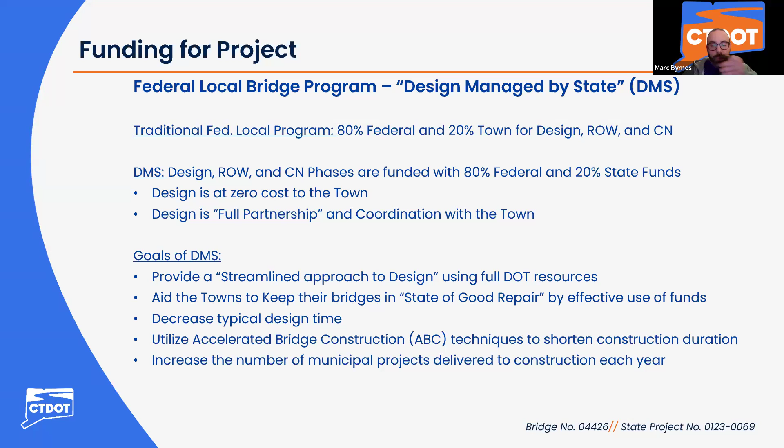Supporting the superstructure are the abutments, or the substructure. Wing walls will also be present on abutments to act as earth retention. And depending on the span of the bridge, you might see one or more piers.

Bridges are given a condition rating on a scale of 1 to 9, with 9 being in excellent condition and 1 being imminent failure. Bridges are inspected on a biennial basis by the department. If there was any issue, they would alert the town immediately to make corrective repairs.

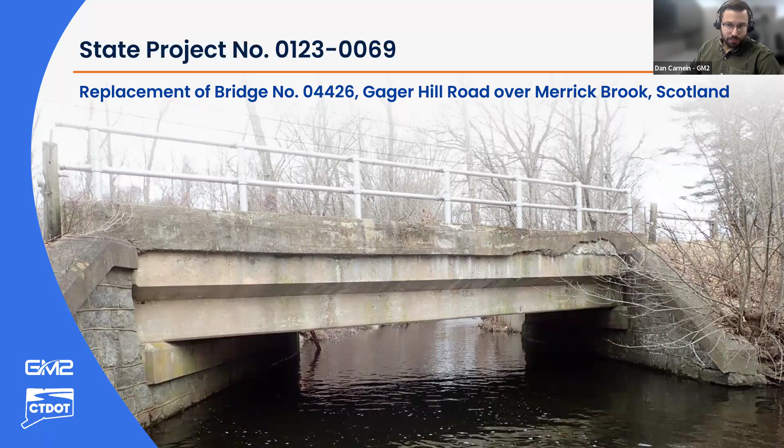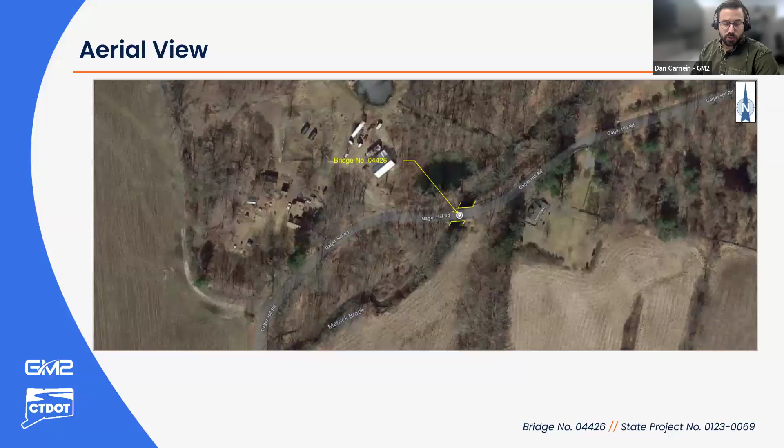That superstructure is supported by stone masonry abutments with reinforced concrete caps and wing walls. The existing span length is 33 feet and the total length is 35 feet. Based on those measurements, the bridge is undersized for the channel, which was measured at 40 feet. The existing bridge is hydraulically inadequate and does experience flooding during storm events.

The bridge provides 2 lanes of traffic with a 25-foot 9-inch curb to curb width. We also want to note that there are overhead utilities located upstream from the bridge. The existing roadway is classified as a rural local road with an average daily traffic of 357 vehicles per day. It has a 30-mile-per-hour speed limit, and there are no existing sidewalks at the site.

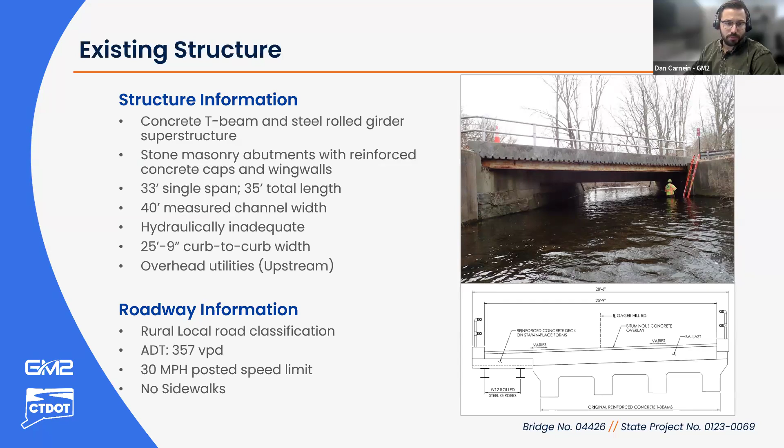Looking at some of the existing conditions, this is the approach, overall in good condition with an overall rating of 6. We want to point out that there is metal guide rail along the north side of the road, and on the south side we only have wooden posts along the edge of the road.

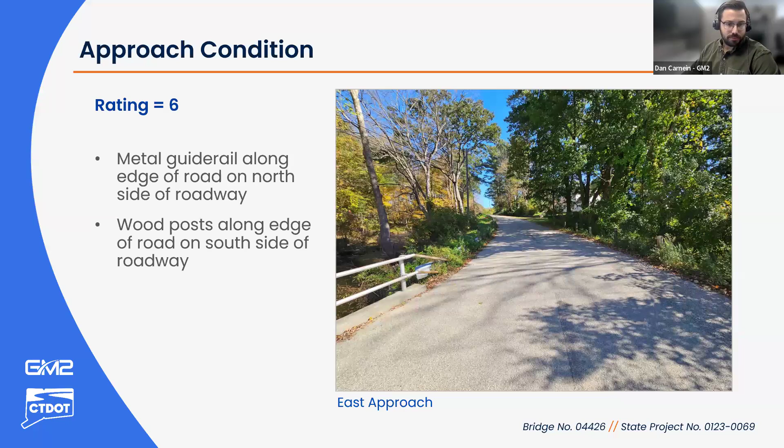Looking at the superstructure condition, that is rated in poor condition with an overall rating of 4. There is some deterioration in the concrete T-beams, and there's some areas of honeycomb and spall. The steel beams have heavy rust and section loss on the flanges and the base of the web at both abutments. And then at the rest of the steel beams, more towards the middle of the span, just have light to moderate rust throughout.

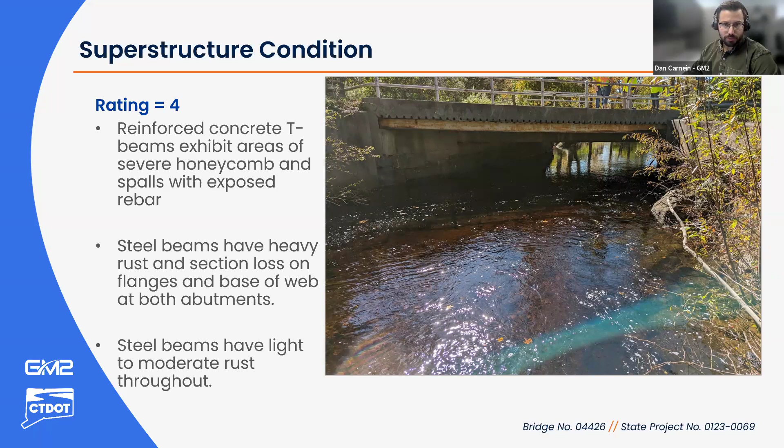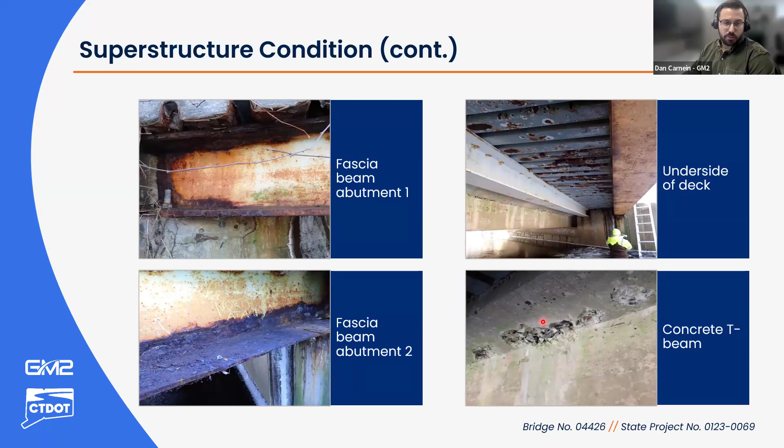The existing substructure is rated in fairly good condition overall with a rating of 6, with some cracks in the mortar joints and some missing mortar areas and voids in between some of the existing stones.

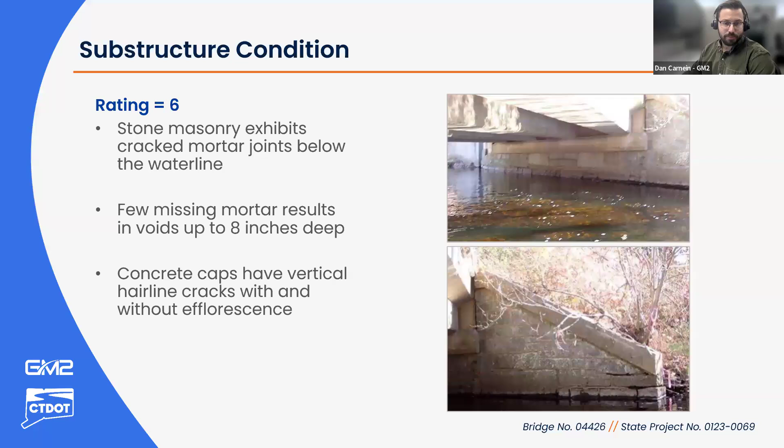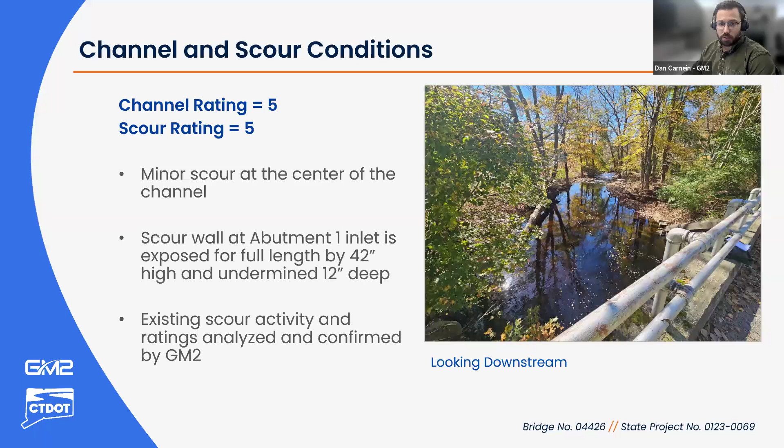The channel and scour conditions at the bridge are in fair condition overall with a rating of 5. There is some minor scour located at the center of the channel. In addition to that, there is a scour wall at the bridge that is exposed and undermined up to 12 inches. And GM2 did recently confirm that scour activity and these channel and scour ratings based off of our own site visits and scour analysis.

So taking that existing information into consideration, the purpose of this project will be to address the structural deterioration and provide a resilient replacement structure. The need for this is we need to replace the deteriorated superstructure of the existing bridge, and we need to improve the existing bridge hydraulic condition.

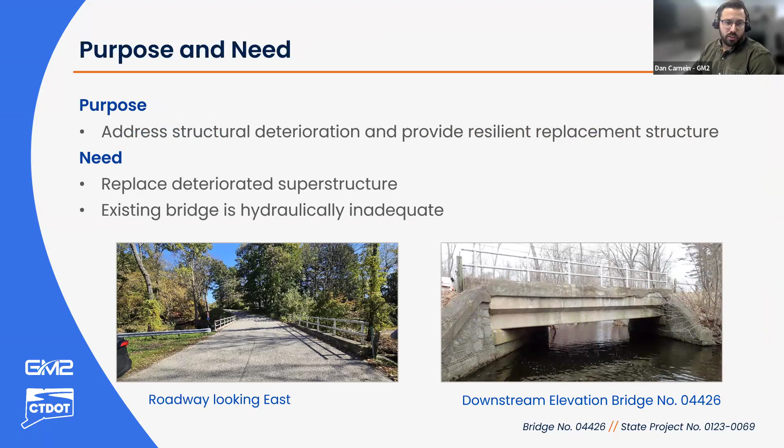So this project will propose a full bridge replacement. The new structure will be composed of precast concrete box beam superstructure supported by reinforced concrete semi-integral abutments that are founded on piles. The new bridge will have a much larger clear span of 48 feet and be oriented on a 30-degree skew. So basically it will be angled to match the existing channel.

On the top side, the bridge will have a 27-foot curb to curb width that will accommodate 2 lanes of traffic. Those lanes will be 10 feet wide, and the shoulder widths will vary over the structure because the bridge will need to accommodate the horizontal curve of the roadway. We'll get into that in a couple of the slides coming up. Some other features of the proposed bridge: we will have open bridge rail on the top, simulated stone masonry on all the exposed substructure elements, guide rail that meets the current safety standards, and a dry hydrant.

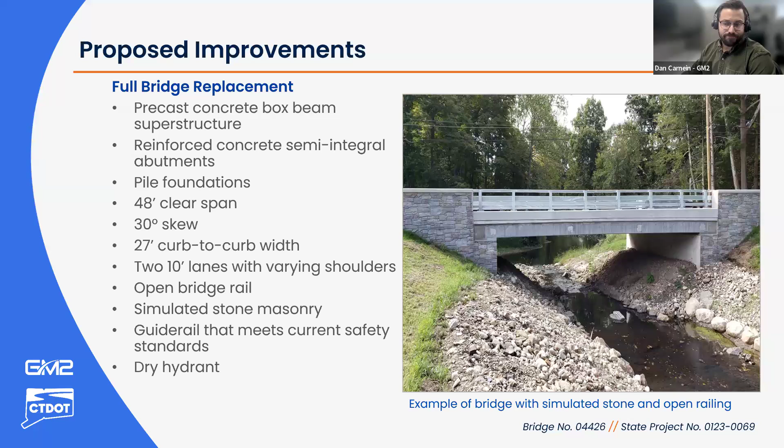The proposed bridge will also improve the hydraulic conditions. So like I said before, we are proposing a 48-foot clear span, which is significantly larger than the existing 33-foot span. The resulting proposed bridge will have a roadway that will not overtop during a 100-year storm event, whereas the existing bridge overtops during that same storm. So we are eliminating that flooding condition during storm events.

As part of our design, this bridge will also be designed for scour conditions at the 200 and 500-year storm, and the proposed bridge actually has no calculated scour for those storm events, meaning we don't anticipate any erosion occurring during those severe storms. And if that weren't enough, we are also proposing additional bank stabilization and piles for just added resiliency. So as Dana said, this bridge will be designed for 200, 500-year storms and won't be going anywhere.

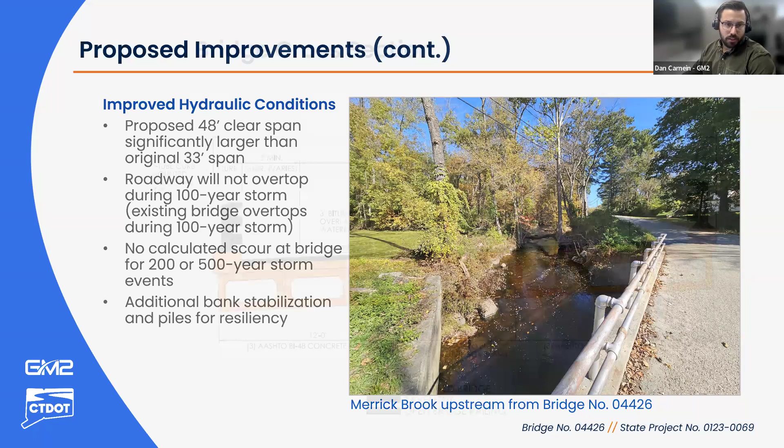This is the proposed bridge cross section. This is a typical section. Looking at the bottom, we have the proposed concrete box beams. On top of that is a concrete deck, and then on top of that is the 3 inches of bituminous concrete pavement. On both sides of the superstructure, we'll have that open metal bridge rail. From this view, you can also see the 27-foot curb to curb width between those two open bridge rails. That'll accommodate the 10-foot travel lane, 1 lane in each direction, and then the 2-foot minimum shoulders that'll vary.

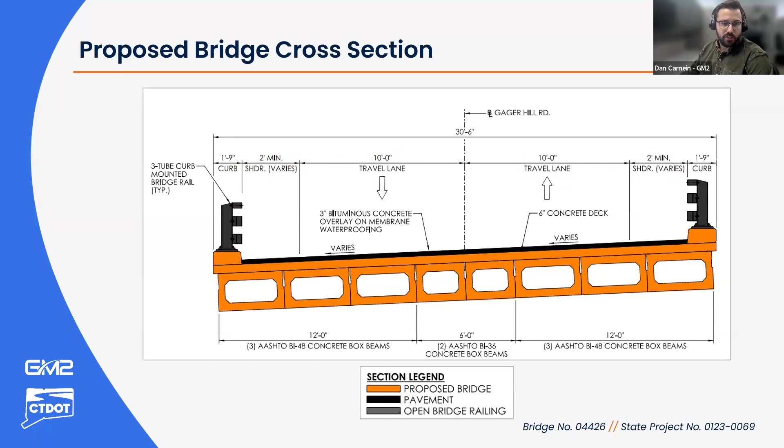This is the elevation view. So starting on top, we have that open metal bridge rail on top of the superstructure, which is in orange there. So that superstructure is that concrete deck and the concrete box beams. That superstructure and open bridge rail are being supported by the substructure elements shown in that pink color. These exposed substructure elements will be treated with concrete form liner for the simulated stone masonry appearance. The semi-integral abutments can be seen on both sides here, and those are being supported by pile foundations. Under the bridge, you can see we are proposing embankment protection on both sides, and that embankment protection will be covered with natural stream bed material.

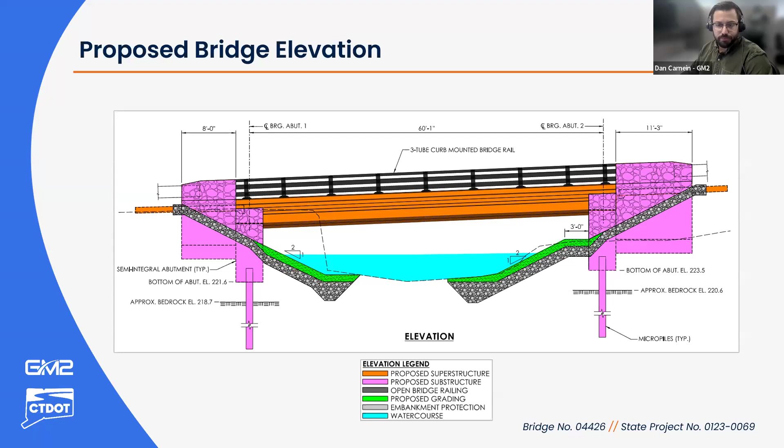So Gager Hill Road will be closed during construction and utilize a 3.8 mile long detour. That detour would consist of Route 97, Plains Road, and Bass Road. So as many of you may know, Bridge 4772 is located along this route, and that is Bass Road, which is currently closed. That bridge will be replaced under a separate federal local bridge program project. And we are proposing to perform work on Gager Hill Road, Bridge 4426, once Bass Road is open to traffic. We are proposing that to limit disruptions to the public.

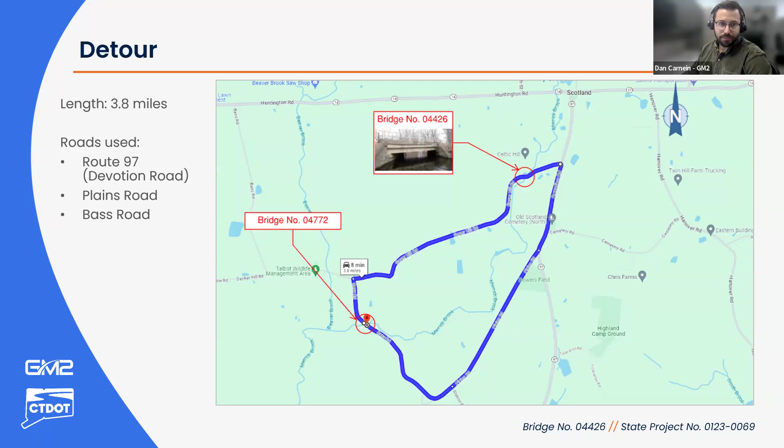Permit-wise, we do anticipate getting all the necessary environmental permits for this project, including a Scotland Inland Wetlands permit and the U.S. Army Corps of Engineers general permit for the state of Connecticut, which includes the self-verification form. We would like to note that we are not located in the FEMA flood zone, so we have no flood management certification required, which we just wanted to point out because that's a little less permitting effort and will help accelerate design a little bit.

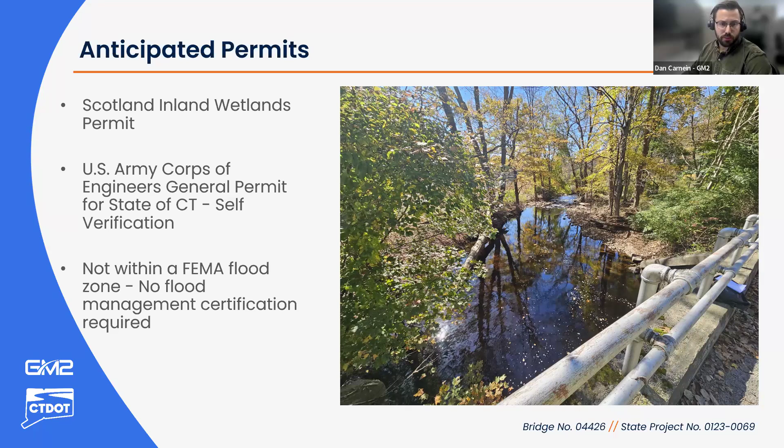So we also have anticipated property impacts. Those property impacts are mainly in the form of temporary construction easements. Those easements would be from 3 of the abutting properties. We have 2 on the upstream side or the north side, and then 1 on the south side. Those temporary construction easements are mainly for contractor access to the channel, so the contractor can get down there, install their water handling devices, perform excavation and grading as needed.

So overall, construction is anticipated to start in 2027, which that start date is subject to rights of way and permit approvals, as well as the proposed construction start after the Bass Road project. So Bass Road would have to be substantially complete, where traffic is back on Bass Road, and then we would like to start Gager Hill Road. And then construction duration, once it does start, is 6 to 8 months, or 1 construction season, which is from April into November.

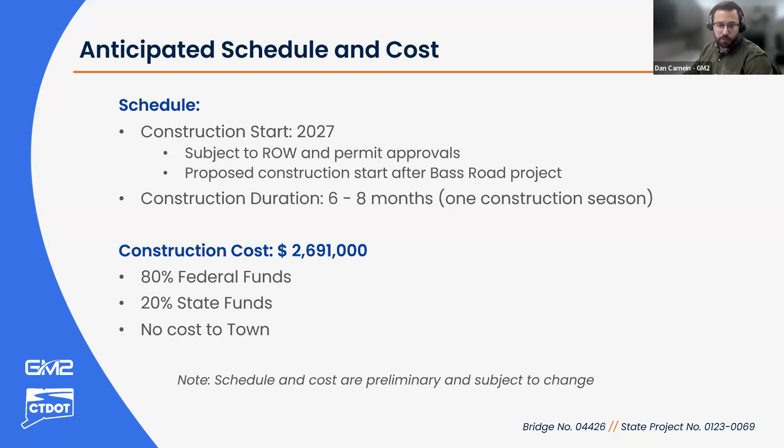Thanks, Dan. Again, my name is Zach Guarino. I'm a project coordinator with the department's Division of Rights of Way. Our office is responsible for acquiring the property rights needed for transportation projects. And as Dan mentioned in the presentation, this project will require the acquisition of property rights. So I'd like to give a brief overview of our acquisition process.

Before we begin, again, I'd like to mention that the specific impacts may change as the design progresses, and that any required property rights will be acquired in accordance with Connecticut General Statute, sections 13A-73 and 13A-98E, as well as the Uniform Act. And as Dan had mentioned, those temporary construction easements will be extinguished at the end of the project. Go ahead and change this slide.

Then our office will determine the fair market value of the property rights which were depicted on that map and use it to establish an offer of just compensation. That offer will be sent out to the property owner in writing, and a right-of-way agent will be available to meet with the property owner and explain the project, go over the specific impacts to their property, and explain how the state arrived at its offer.

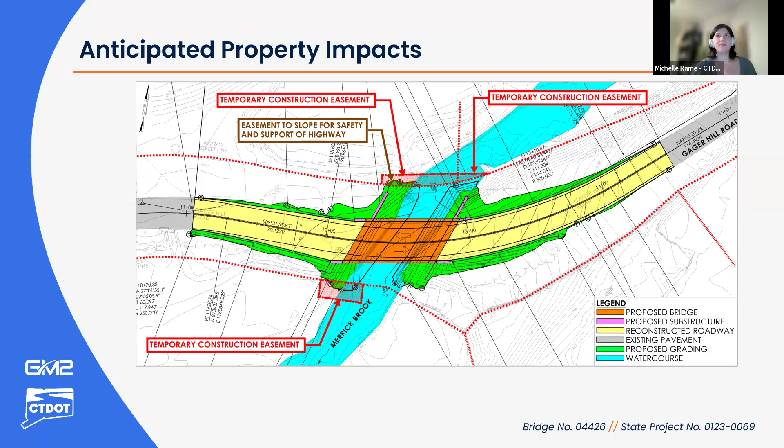Thanks for the question, John. Oh, I see he used Dana's link to come in. Okay, with the host link. Okay, perfect. Yes, he couldn't get on before. So while he was trying to get on, I sent him the email so he could get on. We'll just give this one more minute for anybody who might have any last minute questions, and then we'll wrap this up.

The only other comment, you'd be welcome to start in 2026, the Bass Road Bridge. You're welcome to start a little bit earlier, people are anxious to get the bridge done. We're doing what we can to accelerate that schedule. Appreciate it. Yeah, and just, John, Bass Road is on this detour route, and that is our priority over Gager Hill Road, obviously, with the current closure on Bass Road. So we are focused on 4772 and getting that one out as soon as possible. Oh, go ahead, Michelle. Sorry to interrupt you.

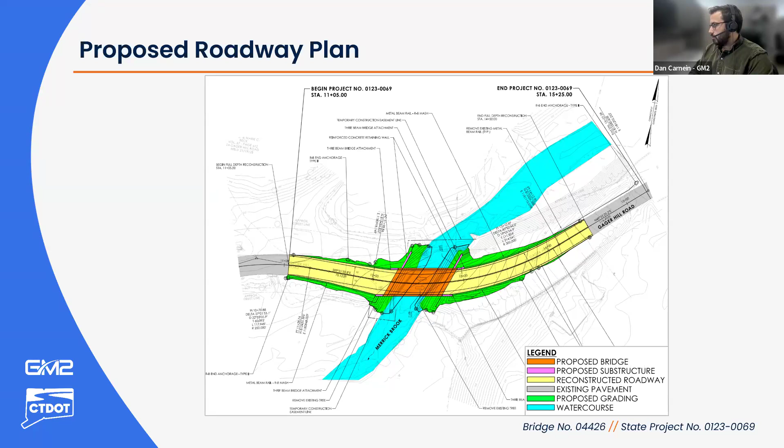Perfect. Okay, for anybody else left out there, just to reiterate again, if you have any questions, the comment period is open until February 6th. You can send us your questions at dot-flbp@ct.gov or send us a voicemail by phone at 860-594-2020. Please reference the project number 0123-0069 in your voicemail. Thank you for joining us, and we hope you all have a great night.